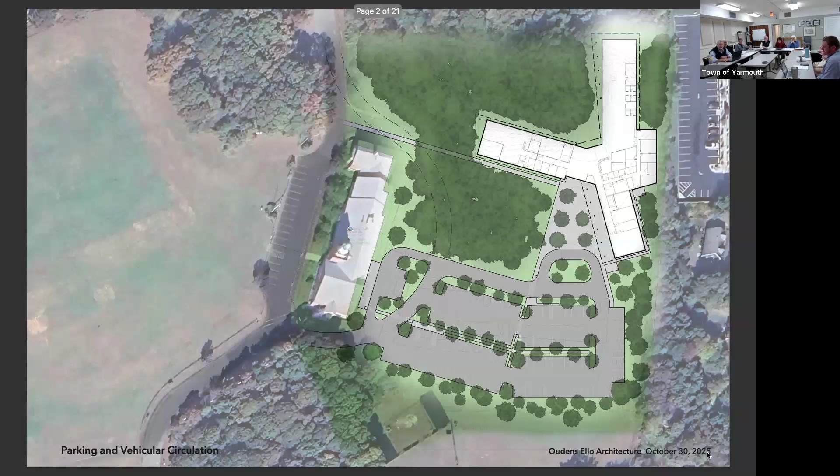I know the last time when Jonathan met with you all, we put a number of different options up on screen about a number of different ways to arrange the parking, and also the other components of the site, the woodland and the edges, with a consistent treatment across the schemes. But really parking is the big item on everybody's minds right now. What we did was take what we heard from you, working with Matt and everybody in his office, and tried to take the best elements of all those different plans and make it into one. So this is where we have landed for the moment.

This meets what we believe to be the parking count needs. So this incorporates 48 spaces that are in the existing lot out there, and it takes 60 for the library. It's really a two-part plan. The first part that Matt's got on screen right now shows the condition of leaving the 18 parking spaces that are to the west of the MacArthur building. The big yellow arrow shows how you would circulate through the site, your arrival to the library, a drop-off sequence there, and also a drop-off sequence for the school. We're trying to make the parking lot work for both buildings, and then you would exit back out the same way you came in.

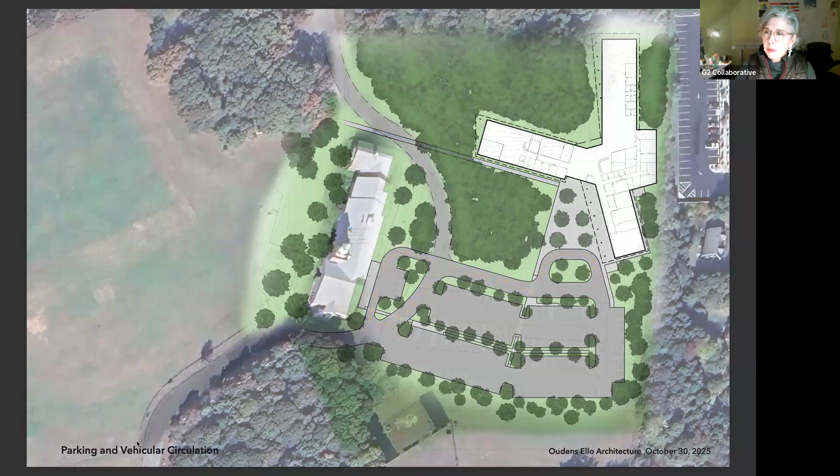What we are trying to preserve at this point is an option to take this one step further, which is the next plan: to move the road away from the west side of the building. I know this was in one of the options last time, but it would remove the 18 parking spaces that are west of MacArthur and have the roads circulate between MacArthur and the library, so that as you come into site, the library has a more prominent position and is really a feature, but keeps the parking and the drop-off the same. There are a number of ways we could think about it. It could be a phase one and a future phase, or it could be considered different buckets in terms of how it gets paid for and constructed. But really, we were excited about the thought that you could preserve this opportunity to make this move of the driveway, which would be beneficial to the library and frankly to the green space to the west as well. So that is the big overview.

I think the other pieces, the planted buffers, the drop-off plaza, remain very similar to what you saw last time. I will explain the bend in the parking. The reason we've bent the lot in the middle is that it gets us the ability to have parking relationships to both the school and the library. If you recall, some of the schemes last time ended up with the parking feeling like it was too far from the school, but also too far from the library in some cases. So this bend in the parking swings a number of spaces up closer to that entry plaza, but still preserves that relationship with the MacArthur School building.

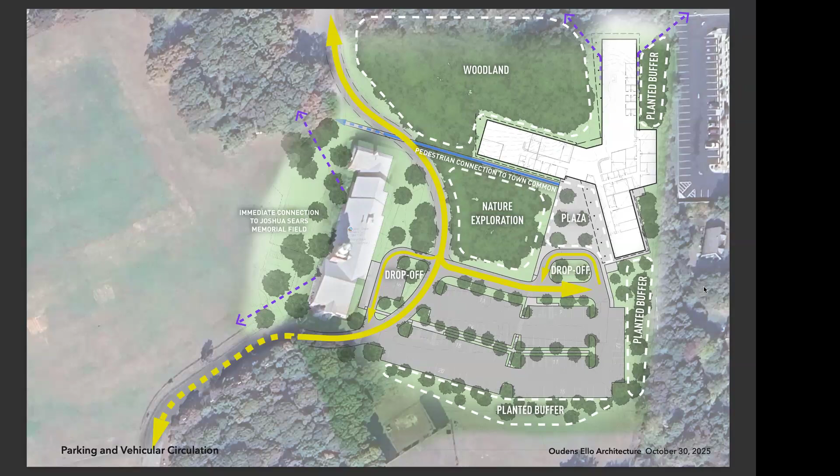But Kathy Williams is the go-to person, in my opinion. If anyone can find it, she can. So should we leave it to you guys to organize a meeting, or is it better for us to reach out to her directly? I can start that communication tomorrow. Okay, I mean on Monday. Yeah, okay, thanks Jay.

Matt, has any estimate at all been done on moving the road? No estimates, no cost estimates yet. Actually we had initially assumed cost estimates would be done before the December deadline, but the MBLC has been very specific that they want them done after the review. So we won't have our estimator look at this until January, or probably late January.

Judy, when everything's being done, is it worth seeing if Route 28 meets the warrants for a traffic light or pedestrian crossing, since there would be more people coming into the site than previously? It may be worth it, because that would get you the pedestrian crossing and everything, but warrants would have to be done, the traffic warrants, to see.

Okay, is that a state road? It's a state road, MassDOT. So I did alert Amanda Lehman to this months ago.

So who would talk to me about traffic warrants? The traffic engineer, probably Matt's civil engineer, would see if there's enough to meet all the traffic warrants, to then see if a light is required. Then you would have to go to MassDOT for them to review it. When you say enough, you mean a traffic study to see counts? Yeah, there's data, 8 or 9 things that have to be considered, criteria they have to meet before they'll consider a light.

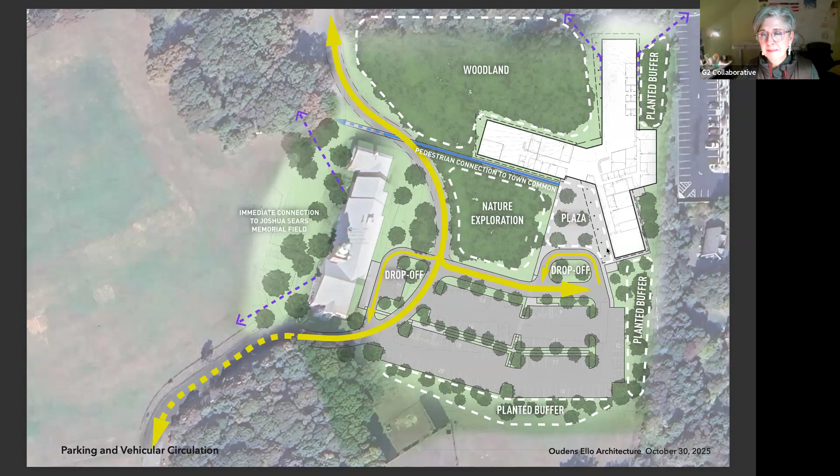And for the people that visited Norwell, the drop off at Norwell to the front door is about 90 feet, 92 feet or something like that. So about the same, as a frame of reference. It feels, it's not an uncomfortable distance to walk. So that's just what I wanted to mention. Great, thank you.

Any other questions or comments about parking? No. So I wanted to cover the Norwell Library visit that was on your agenda.

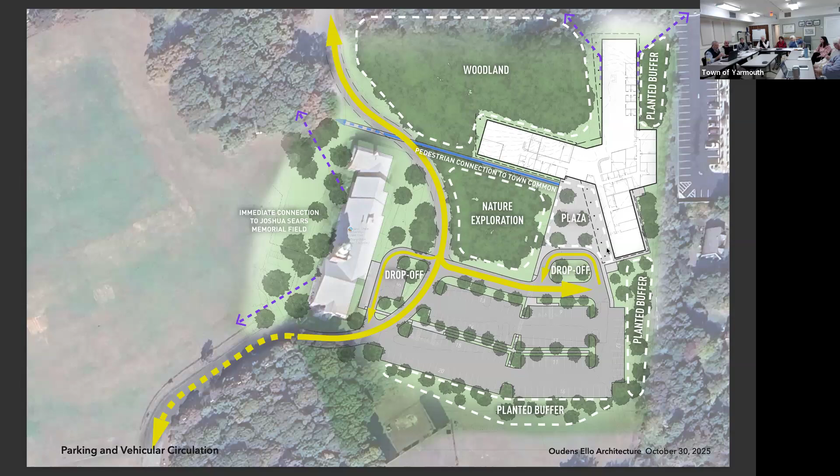There are only two people here that went, David and Joe. Phoebe was also there. For those of you that have not been there, I'm assuming everyone else has not, so I just have a few slides to orient you quickly. I'm not going to spend time on these, just so you see it and have some context.

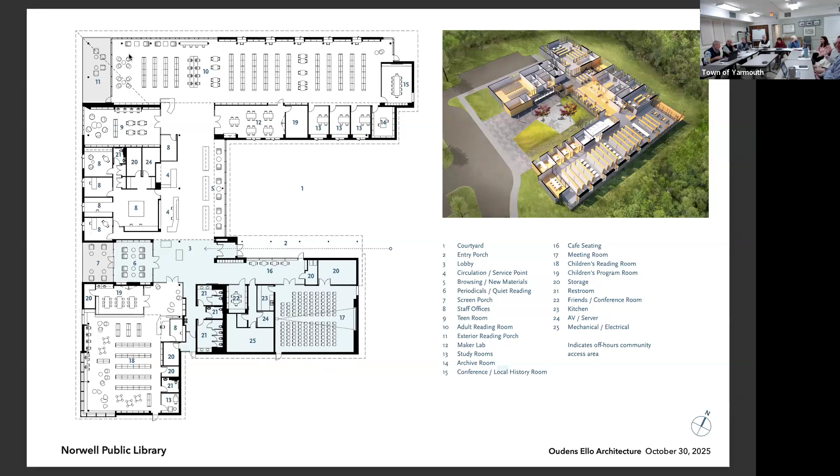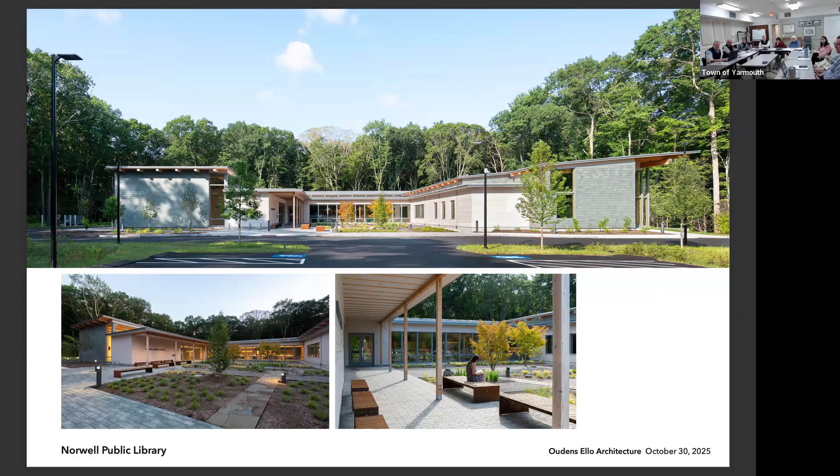Did they have any solar panels? They did not put solar on the building. They could, but they never did.

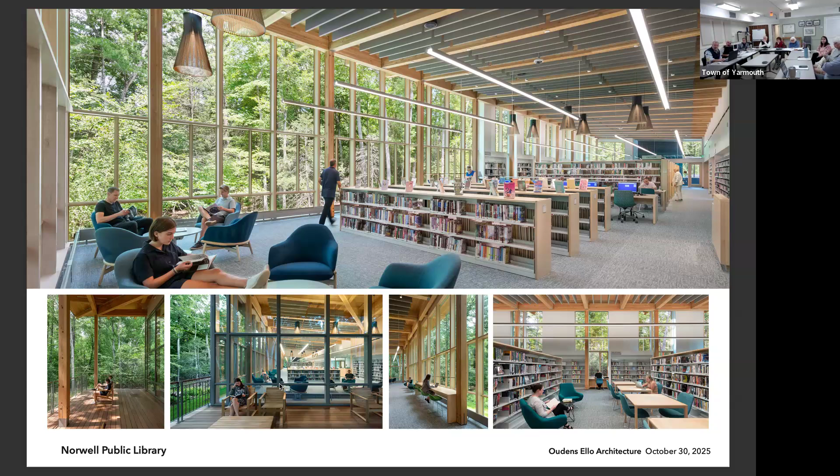Interior of the adult wing—similar in scale probably to the adult wing we're looking at for you guys, a similarly scaled building. Again, really trying to blur the lines between indoors and outdoors, so strong connections between inside and outside. We have a couple of covered porches—those two bottom left images are the porch at the end of the adult wing. There's also a screen porch off the periodicals room. The children's room is similar scale to adults, a smaller room, but the same character and the same great connection to the outdoors.

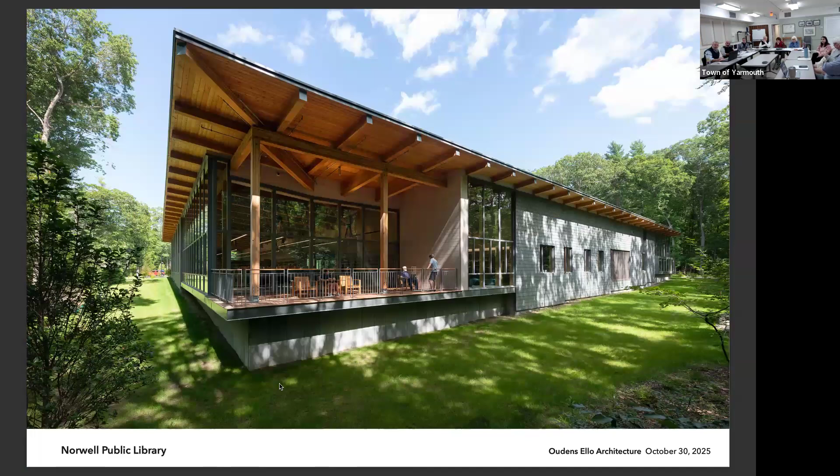This is a view from the back, from the woods, looking at the building. That's the adult wing. Do any of the windows open?

Yes, they open, and we think that was a point of discussion with the staff. It's an operational question—at the end of the day, it's kind of a hassle to have to go around and close windows that get opened. We've had many conversations about this with different library staffs and communities about how to manage that. Some people take the handles off the windows, so they get opened on a nice day, then they take the crank handle off and put them back on. It's still an operational issue, so it's a question for the town and for the library staff.

We advocate for operable windows because we think it's important for people to be able to help control their immediate environment—it's nice to get a little fresh air in a building. We don't use it as a way to passively ventilate buildings; if that's something you guys are interested in, we can pursue it, but that's not why we do it. We do it because it makes for a better personal experience. So there are fewer operable windows in this library than in some of our other buildings—we minimized the number so the staff wasn't going around to 50 windows closing them at the end of the day.

So I'll leave it at that. David and Joe, I don't know if you guys have any takeaways from that visit. I think Mindy visited at another point on her own.

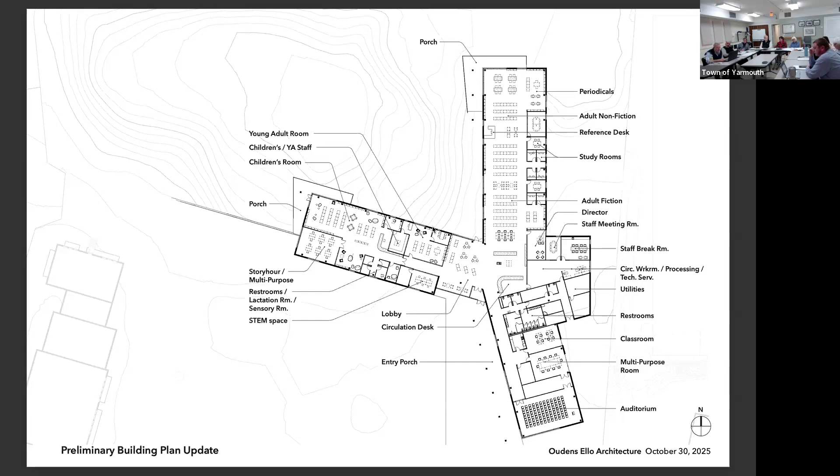So again, this is another pass. There will be many, many iterations of this. Where's the teen room? Oh, sorry, teen room is here. Let me back up to the color. So the green is teens. Okay, good. So this is the teen room.

This is the STEM space here. There's a small study room associated with teens, which is here. The children's and YA staff is here. So there's a desk and a room here.

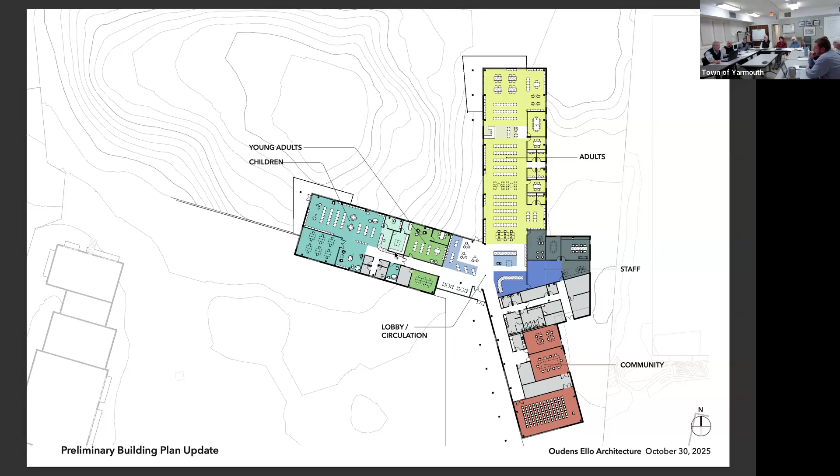And actually, I'll go to this color plan, maybe easier to see. I know this is kind of small for everybody, but I can get my cursor there. This is the desk, the children's and YA desk. There's a glass walled office space or workspace that supports that desk. So from that room, you can see into teens, you can see into children, you can see from the desk into teens. Teens is enclosed, but it's glazed, so you can see into it from outside. And the maker space, the STEM space, is accessible either by teens or children. It's sort of outside of either of their rooms, off of the public circulation.

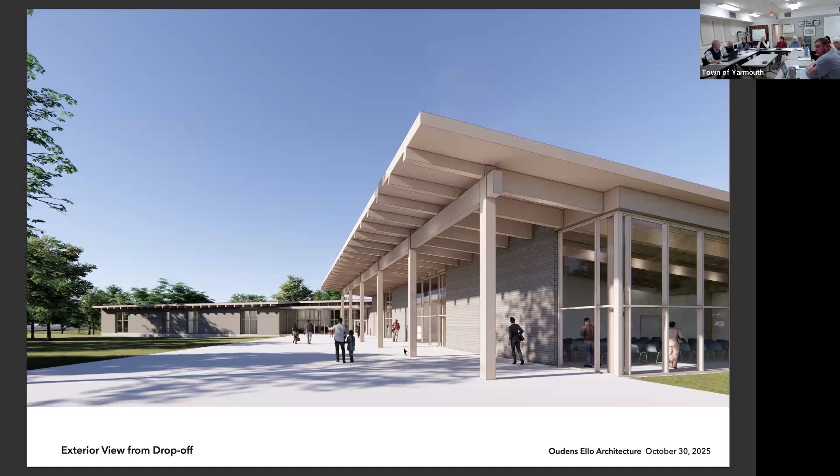I'll move to a couple of the interior views and then I'm happy to jump back to the plans if you guys have questions. So updated entry view, the drop off actually would be a little closer than what this suggests. The edge, the end of the drop off sort of corresponds to this second column. So it would be sort of about where these people are. And then, as Gigi said, it's about an 80-foot walk to the front doors, which are back here.

In the rendering, what's the ceiling height? It slopes, and I think it goes 14 at the low end to 18 feet at the high end. Is that right? Yeah, that's correct. Right around there. So that's similar to Norwell or Eastham. If you guys have been there, it's a similar height. I think that's actually even a little taller.

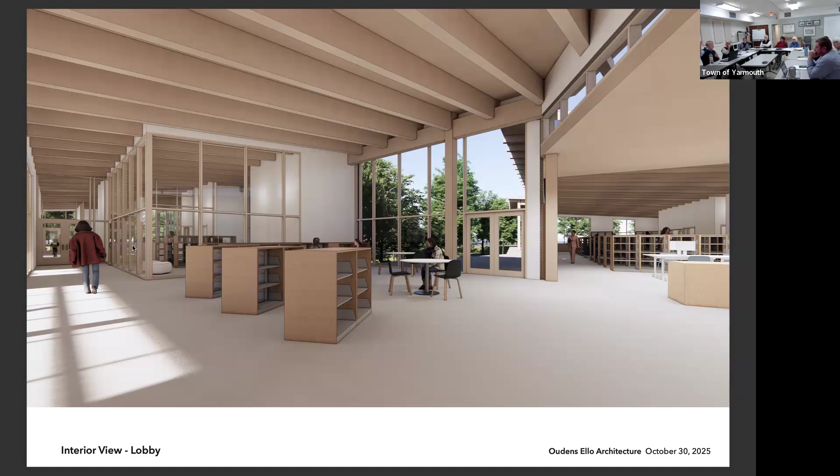Yeah, so the way the roofs work, right now we're showing that as clerestory. Whether that can stay clerestory, I don't know. It depends on the clearances. It's a little tight right now, so it may not make sense to do it. We're still working through the roof geometries of the three wings, but yes, that's what you're seeing in this image.

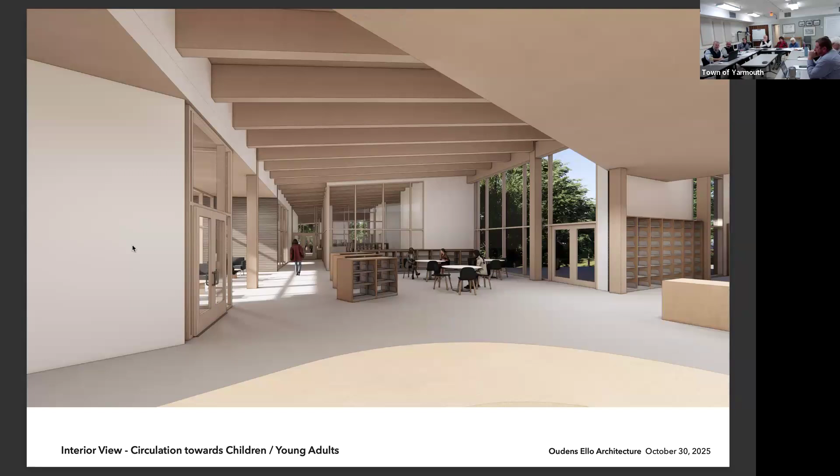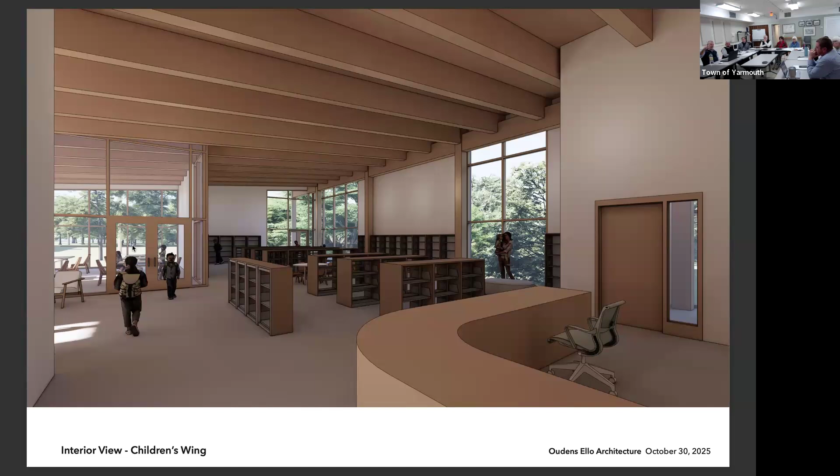Next view is circ desk looking towards, a little further back. This is circ desk now looking down the length of the children's wing and the teen room, inside the children's room. So the desk is on the right. Off the screen to the right is the workroom that supports the desk. The door to the right of that chair is a staff office. The children's room is pretty open with the exception of the enclosed story hour multi-purpose space.

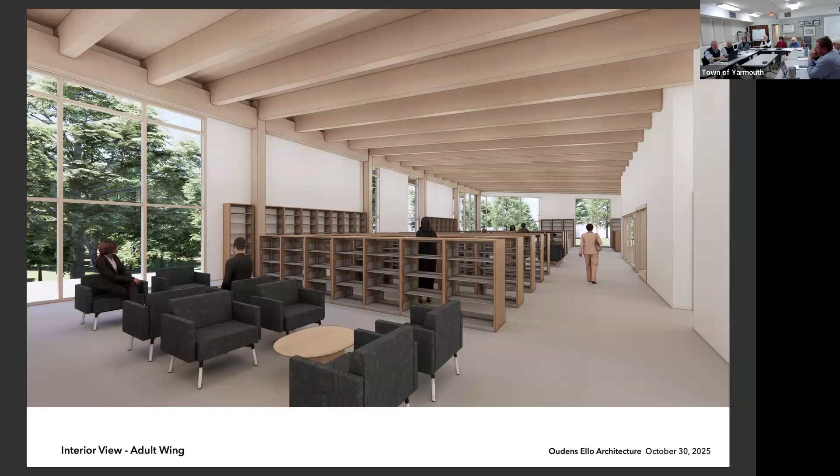Adult wing, and again, these are super preliminary, but it gives you a sense of the scale. The right-hand side is all the study rooms. The reference desk is two-thirds of the way down this wing, facing those rooms. This is now at the far end of the adult wing looking back out towards the central green space.

So they're super rough and preliminary, but it gives you a sense of the scale and general relationship of things.

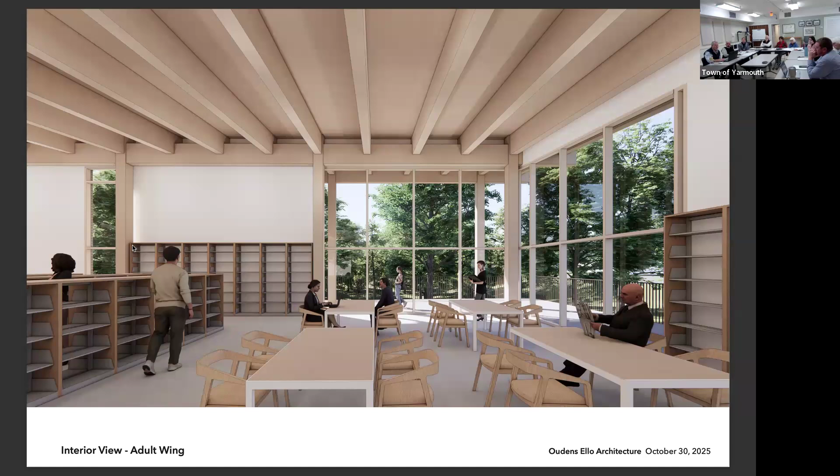I'll jump back to the plan if anybody has any questions. Any questions for Matt?

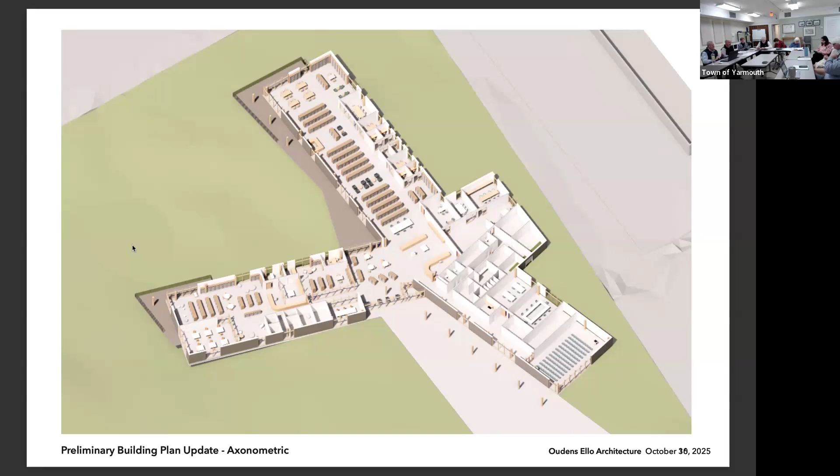So John and Linda and I got together. Was Mindy there? Mindy was there. Yeah. Okay. I didn't miss where when. Okay.

I think we've made some progress with cleaning up the links between the town sites. I know for me, I try to go in as if I'm blind and don't know what I'm looking for, and I seem to get to the library information much more quickly, just a couple of clicks now. I did look today. You cannot, from the town site, see the trifold like you do on the library site. So that one place where you can see the same information is still missing.

So Jay, was that clear? When you go to the library site, there's a facsimile of the trifold information, not in a trifold format, but it's right there with all the colors and everything. But on the town side, you can't find that. I guess I just went library, and that's why I found it.